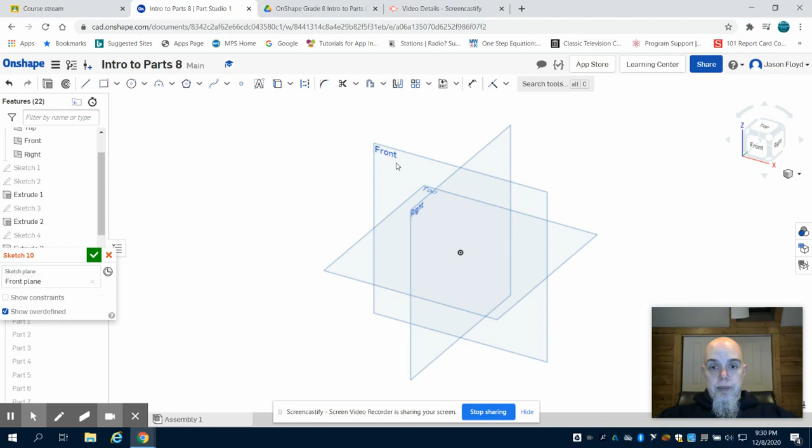The first thing we're going to do is make a 2-inch by 1-inch rectangle. So we're going to come to OnShape, create our sketch, and draw that front view. Selecting that front view, I'm going to orientate myself, choose my rectangle tool, and create a 2-inch by 1-inch rectangle.

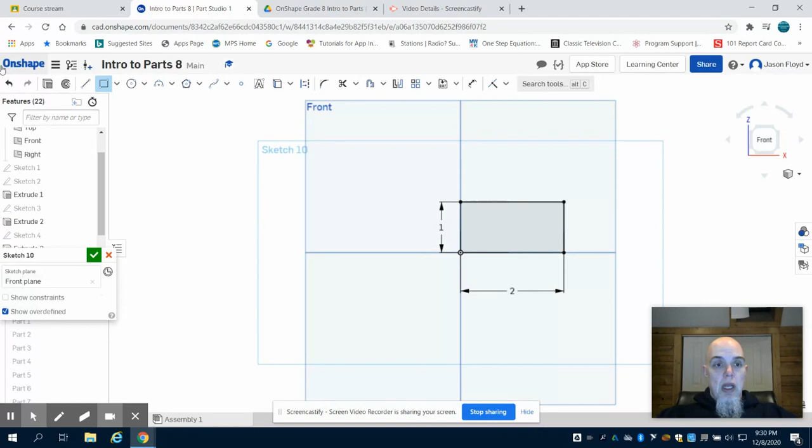Now if I look back at my drawing, I can see my extrusion in the top view is 1/4 inch. I'm going to click extrude, extrude this face 0.25 inches, and click the green check mark to close that out.

I can then use my navigation cube to gain perspective. Now, you're going to see that this isn't actually a rectangle, that I have a curved edge here.

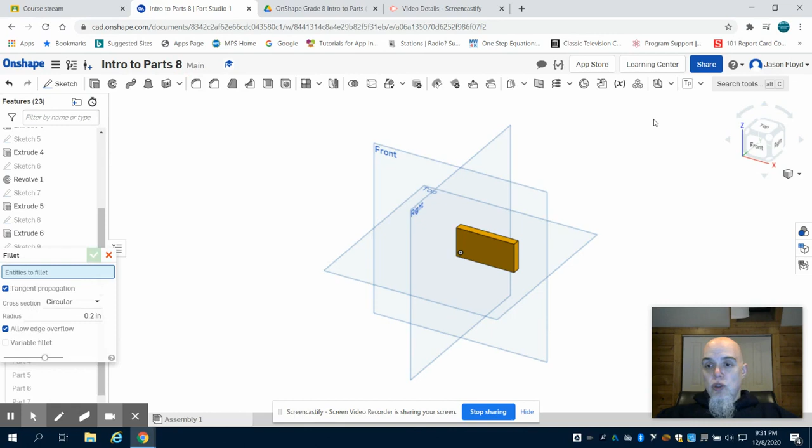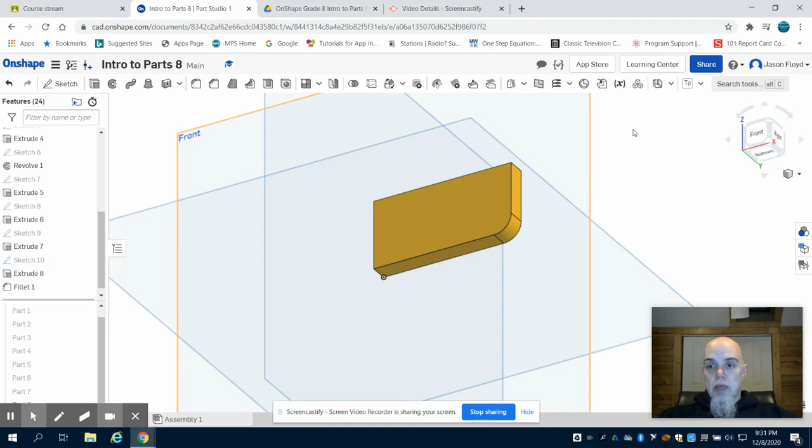So I'm going to come up here to my fillet tool. I'm going to select my fillet tool, and what the fillet tool does is it rounds an edge. I know I can see in that drawing that my bottom right edge has a 1/4 inch radius. I'm going to select this edge, come down to my menu, change it to 0.25 inches, and click my green check mark.

Going back to my front view, I can see that my 3D rendering matches that front view now. I also can see that I have a hole with a 1/2 inch diameter that is 1 inch centered horizontally and 1/2 inch centered vertically.

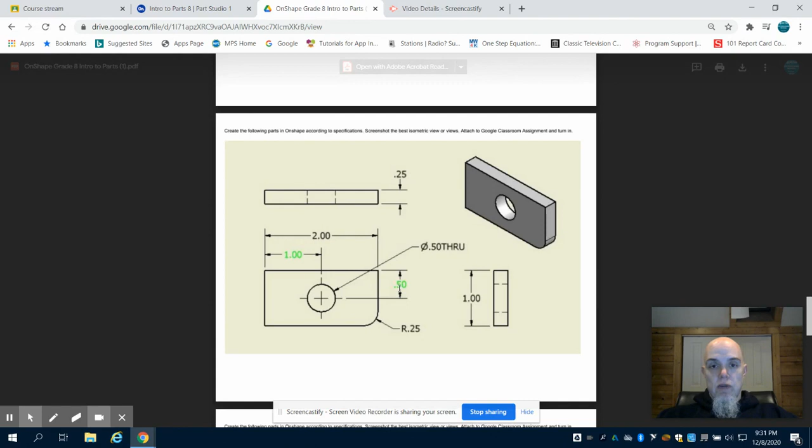I'm going to lay a new sketch down and put it on the front of that part. I'm going to grab my circle tool and draw a circle roughly in the center with a 0.5 inch diameter. I'm going to hit my escape button to exit the tool.

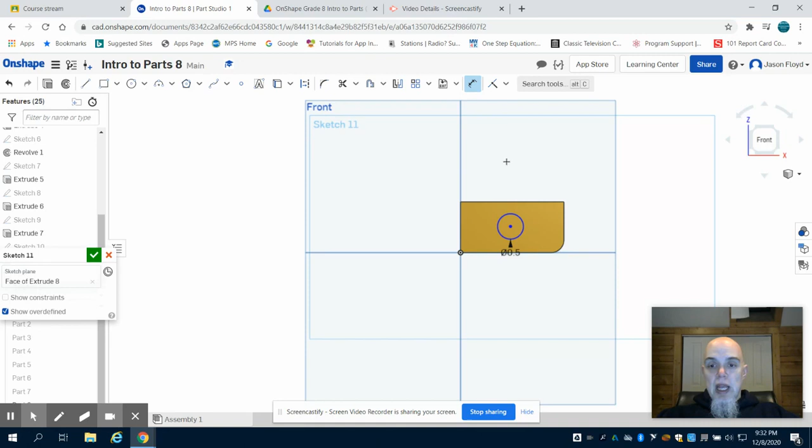Now I'm going to click on my dimension tool. I need to dimension it from the center to the side, 1 inch, and from the center to the top, 0.5 inches.

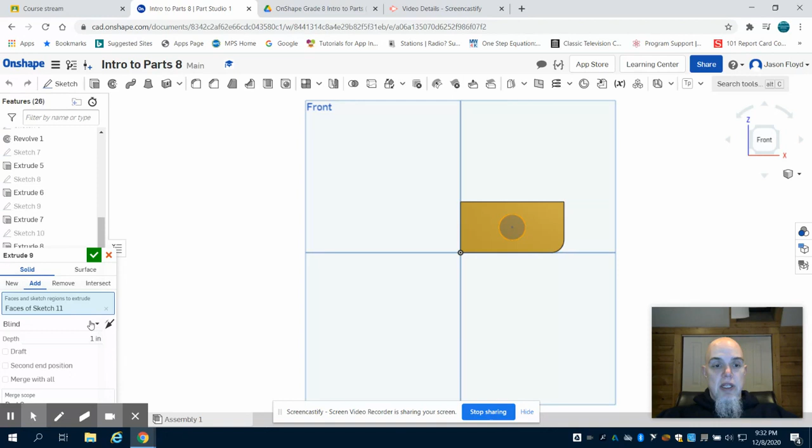Again, I'm going to click on my extrude button. I'm going to select that face, and instead of adding, I'm going to remove it. I'm going to gain perspective on this and extrude it 0.25 inches, which is the thickness.

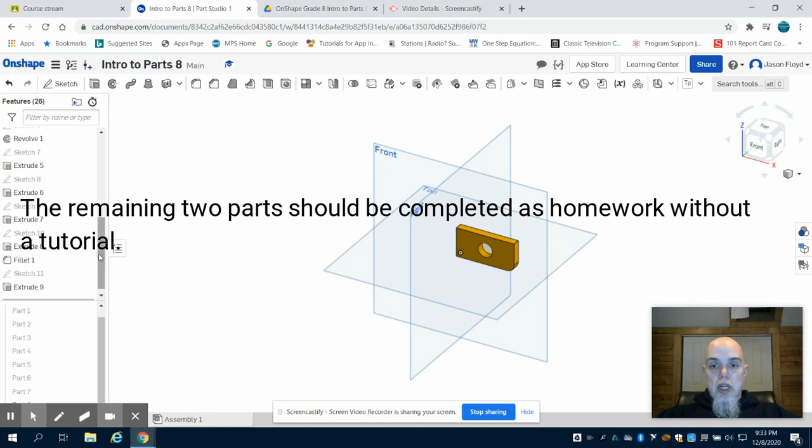Green check mark to make it happen, and I've now created my part.